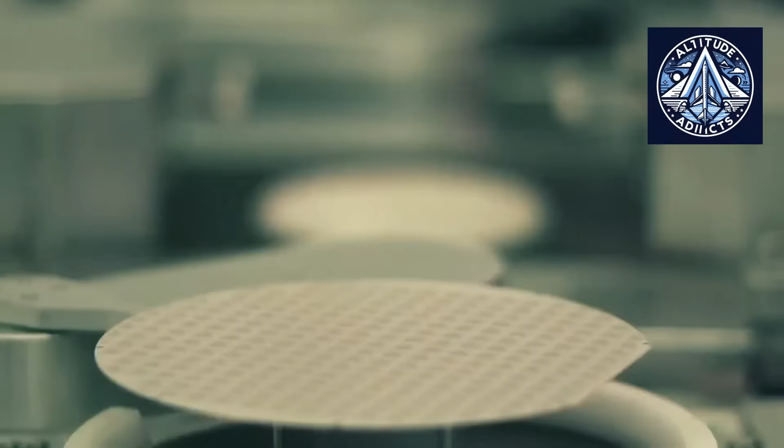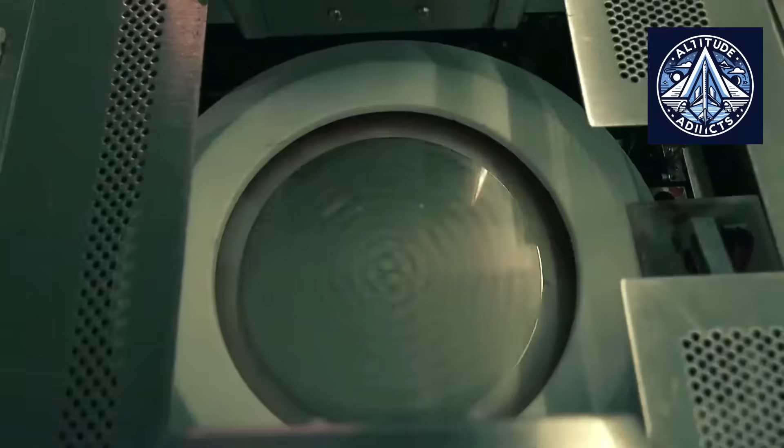The company has also pulled back the curtain on an expanded technical roadmap, revealing a higher memory version scheduled to hit the market later this summer, alongside a specialized low-power variant. Furthermore, they are planning a full structural transfer of the open-source Zephyr real-time operating system to the chip architecture before the end of the third quarter of 2026.

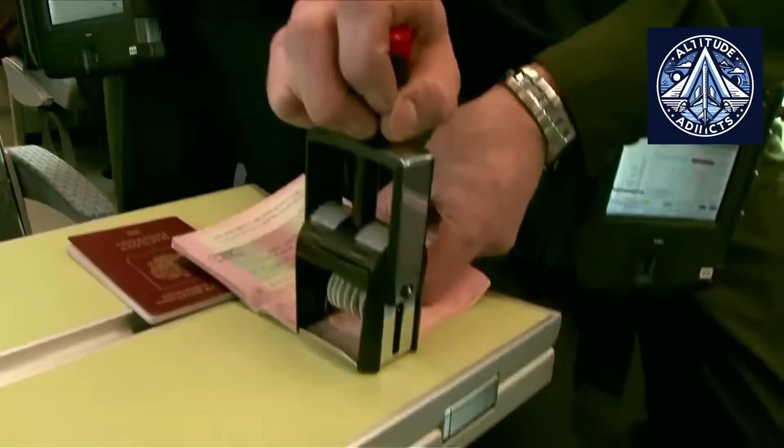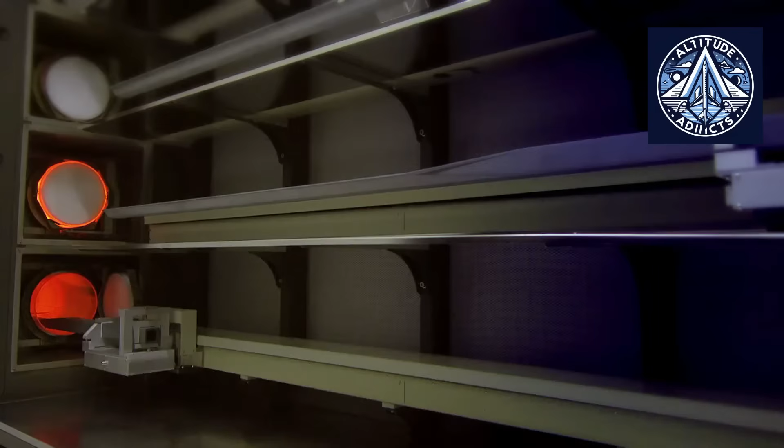To understand why this matters, you have to look at what is being replaced, because the Baikal-U is specifically built to completely substitute the STM32F4 and STM32F7 families from STMicroelectronics. Those European components are currently the most extensively used foreign industrial microcontrollers across Russian automation and embedded systems. That is why this sudden, large-scale hardware pivot is such a major industrial flashpoint.

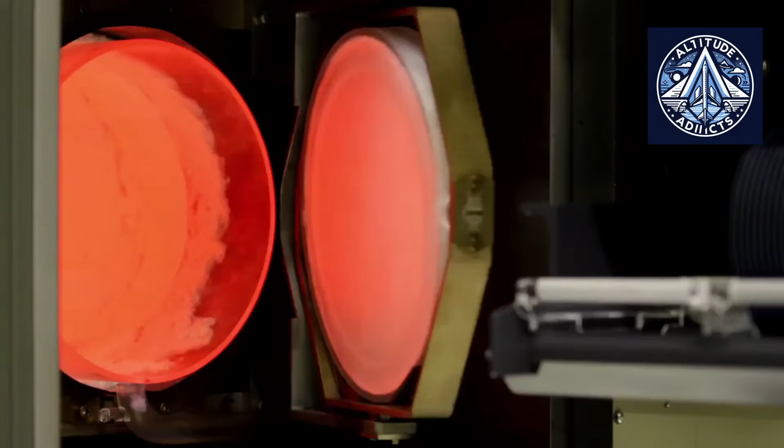Unlike previous iterations of Russian processors that relied on heavily licensed foreign CPU architectures, this entire system is constructed from the ground up on open RISC-V technology. The foundation relies on 3 distinct processor cores developed by the domestic intellectual property firm CloudBEAR.

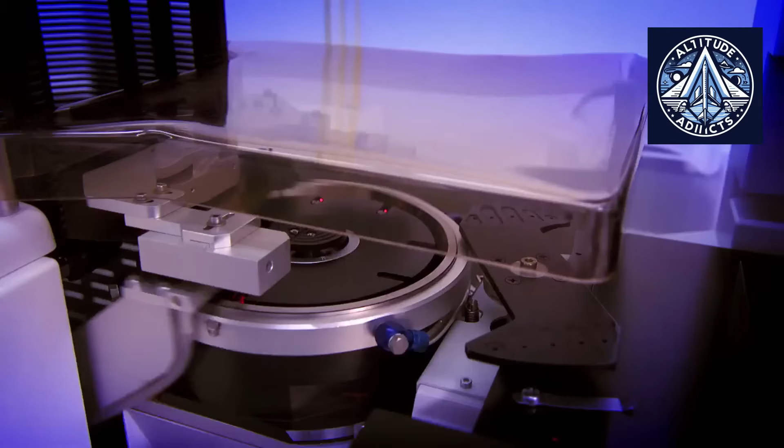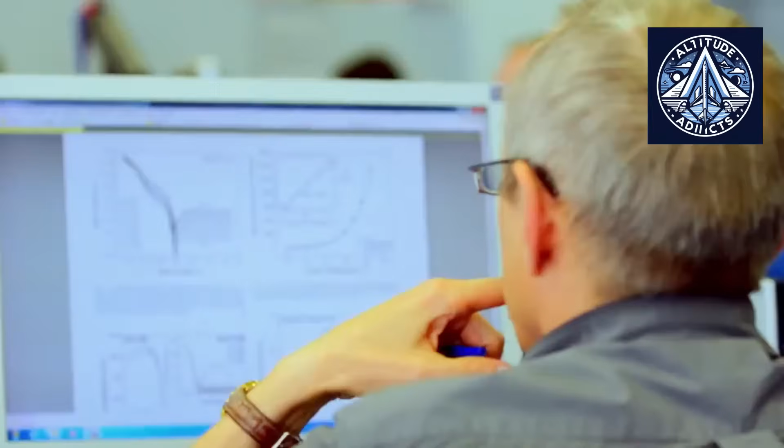Let's look closer at the silicon layout, because this microcontroller combines 2 CloudBEAR BR350 high-performance 32-bit cores running at up to 200 MHz, with a single CloudBEAR BM310 core operating at up to 100 MHz. Rather than just trying to throw raw computing capacity at a wall to see what sticks, each individual core is assigned a highly specific function inside the controller architecture.

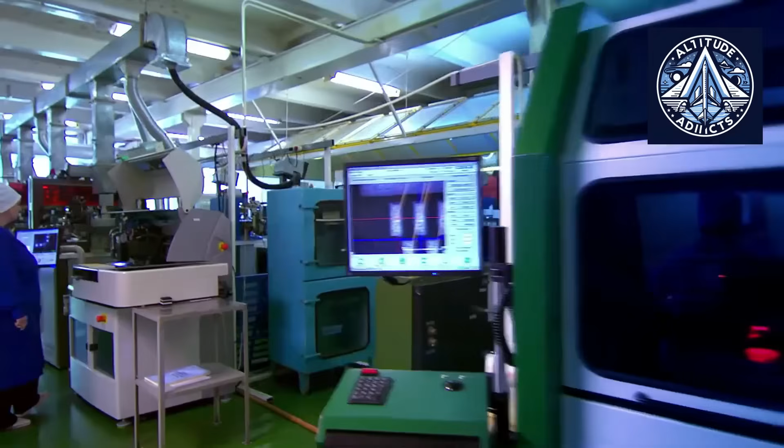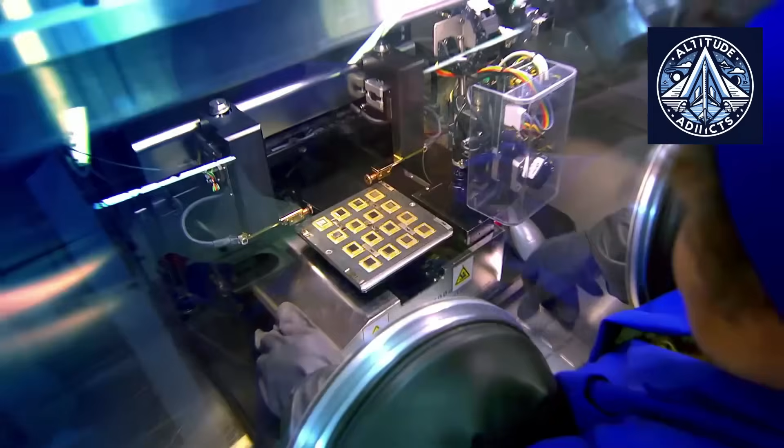For instance, a single BR350 core handles real-time control tasks that absolutely require strict deterministic timing, which makes it perfect for industrial automation and precise motor control. Meanwhile, the second BR350 core manages the background operating system services, complex communication protocols, and the primary application logic.

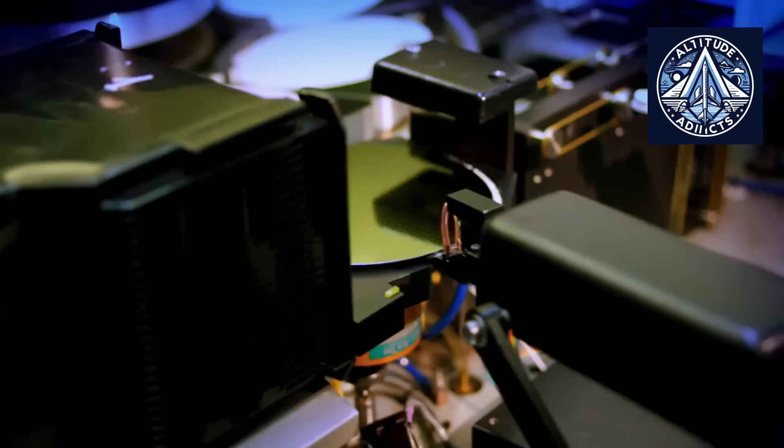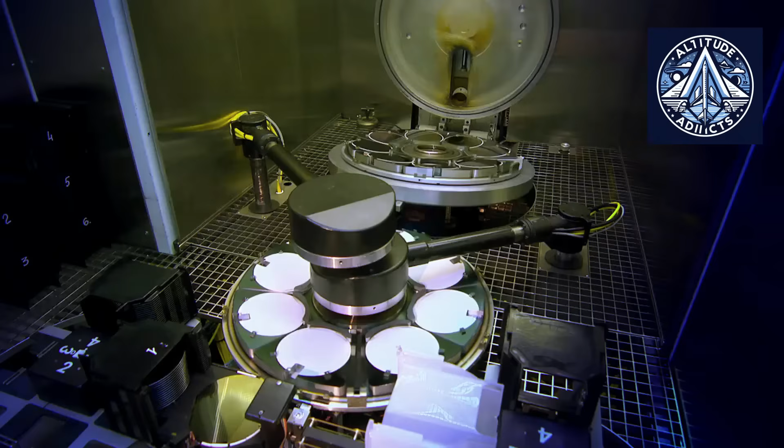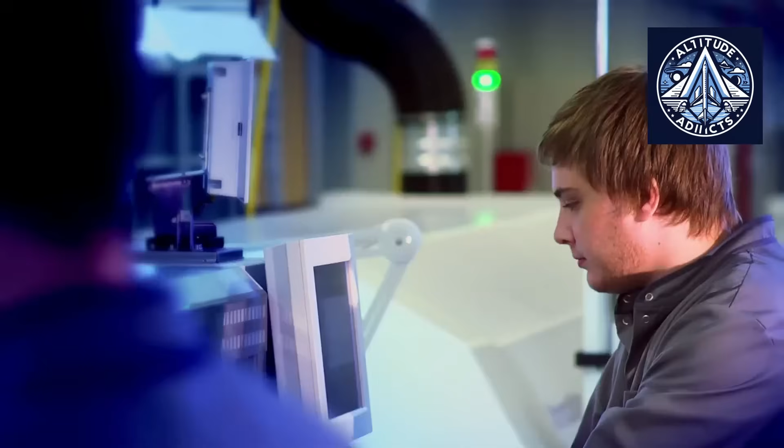The lighter BM310 core is left responsible for programmable input-output functions, allowing peripheral control interfaces to run entirely on their own without overwhelming the main processing cores. This strict division of labor is incredibly crucial in heavy industrial control systems. It allows the machine to execute multiple complex tasks simultaneously while keeping the timing perfectly predictable.

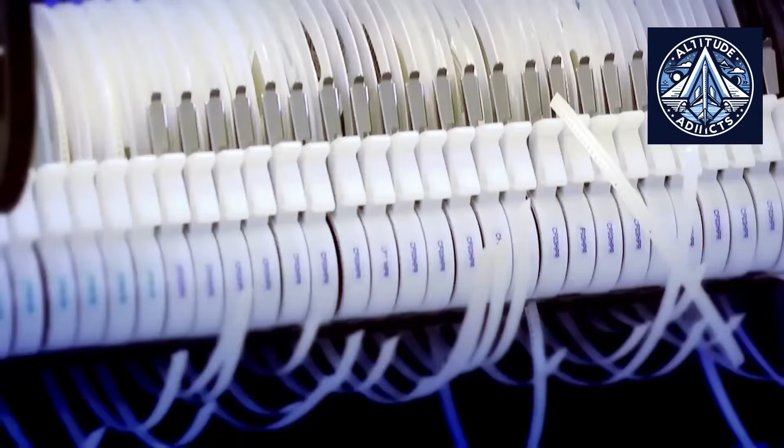Now, let's step away from the heavy specs for a second and look at the bigger picture here on Altitude Addicts. If you're tracking how modern autonomous systems and advanced manufacturing actually run, it always comes down to these tiny, unflashy chips hidden inside the metal casings.

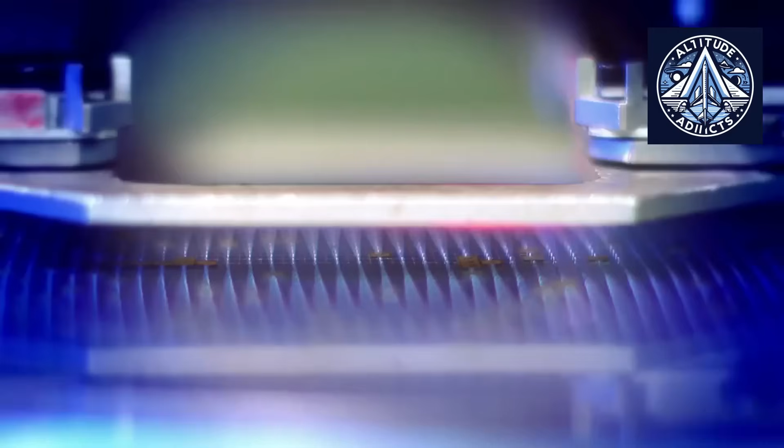From day one, the Baikal-U was engineered strictly for harsh industrial environments, not consumer gadgets or home electronics. We are talking about automated process control systems, like SCADA, and programmable logic controller environments, operator control panels, electric utility meters, and rugged industrial sensors.

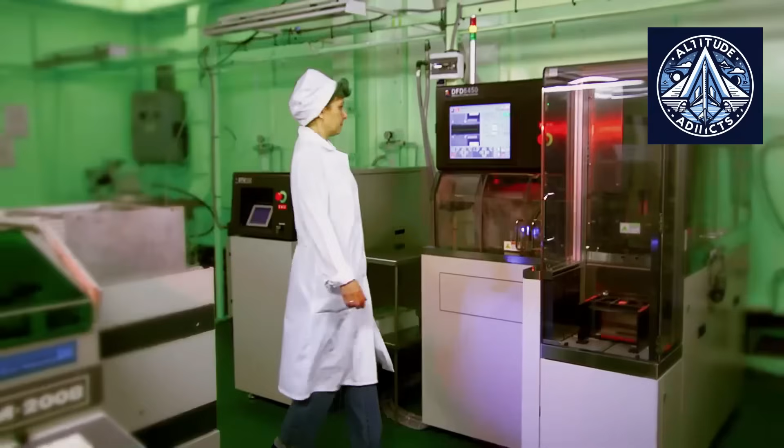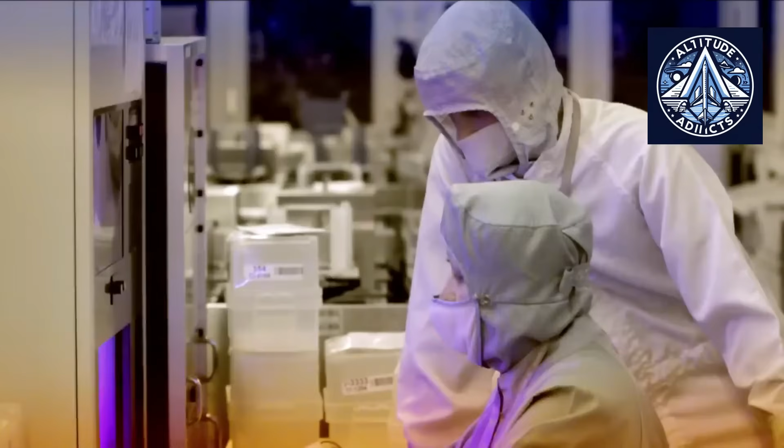It is also targeted squarely at robotic equipment, automated motor control systems, unmanned vehicles, and various industrial Internet of Things setups. Because of its deep, integrated motor control capabilities, the processor is exceptionally well suited for industrial drones and complex robotic platforms that require pinpoint real-time control of electric motors.

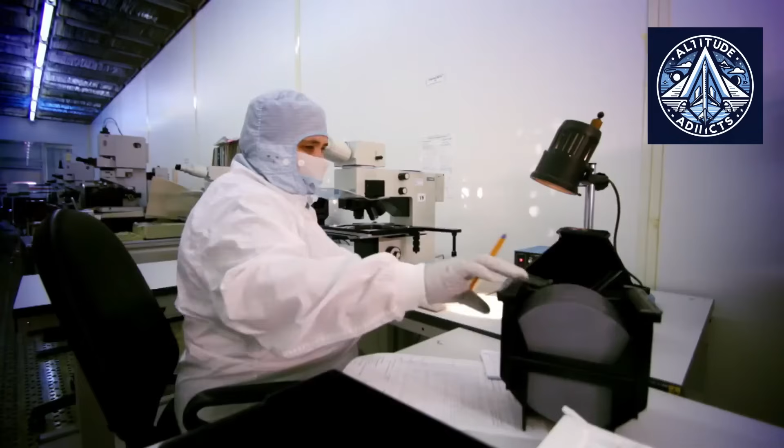The state has heavily prioritized replacing imported electronic components with domestic alternatives wherever possible, primarily because these sectors run the nation's most critical infrastructure.

Coming up next, we are going to dive straight into the brutal benchmark comparisons, showing how this new chip stacks up against the West's absolute standard, and we will reveal the exact pricing that is making this alternative incredibly cheap for manufacturers. So stay right here.

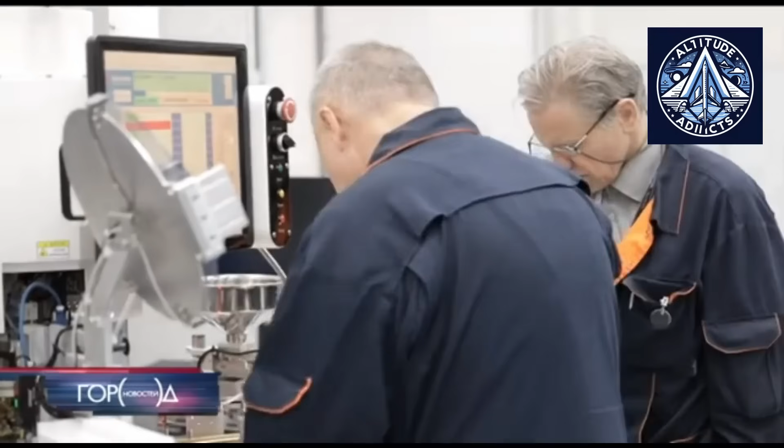One of the most fascinating claims made by Baikal Electronics is focused entirely on raw performance metrics.

The company is directly pitting their hardware against the STM32 F7 family, which is one of the most widely deployed ARM Cortex-M7 industrial microcontrollers on the planet. According to the official documentation, the Baikal-U achieves a score of 1,788 in CoreMark testing and 865 DMIPS. In stark contrast, the classic STM32 F7 device it is being compared to delivers 1,082 in CoreMark and 462 DMIPS.

Depending on the exact STM32 model you pull for a side-by-side comparison, these numbers indicate a massive performance jump of roughly 65% in CoreMark and about 87% in DMIPS. Overall, the developers state that Baikal-U offers a processing baseline that is at least 50% superior to comparable foreign controllers. Let's break down what those abstract terms like CoreMark and DMIPS actually mean for real-world machinery.

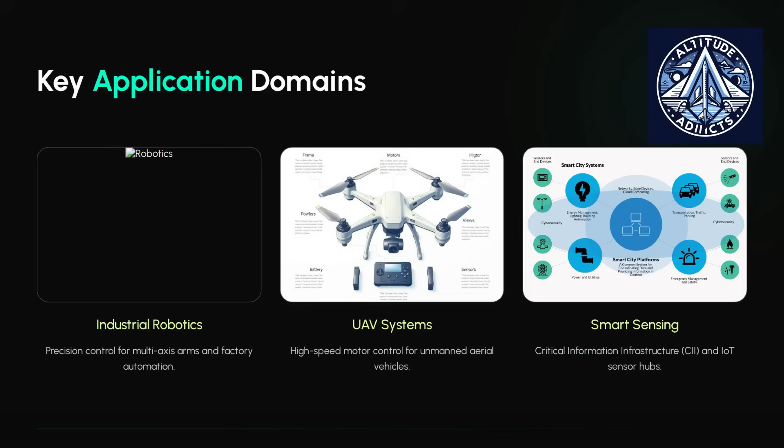CoreMark is the standard industry benchmark specifically built to test embedded processors by measuring how efficiently a chip runs day-to-day duties like data processing, state machines, linked lists, and basic math operations. A higher CoreMark score simply means the processor can tear through a much larger number of software instructions in the exact same window of time. This translates to an ability to handle far more complex control algorithms, dense sensor processing, or robotics tasks without needing to overclock the chip or run higher clock speeds.

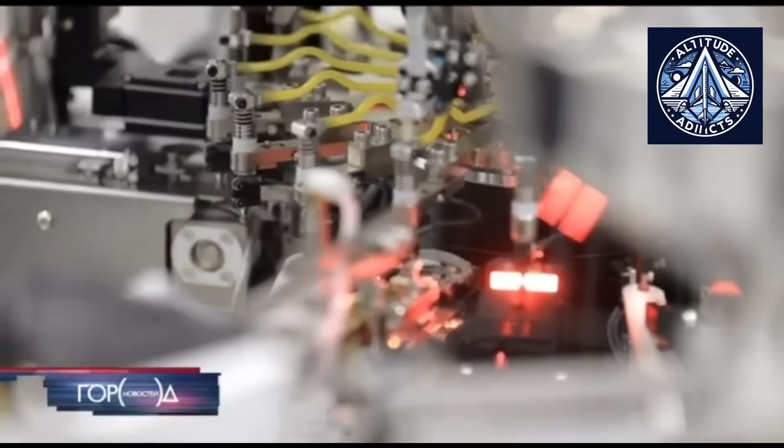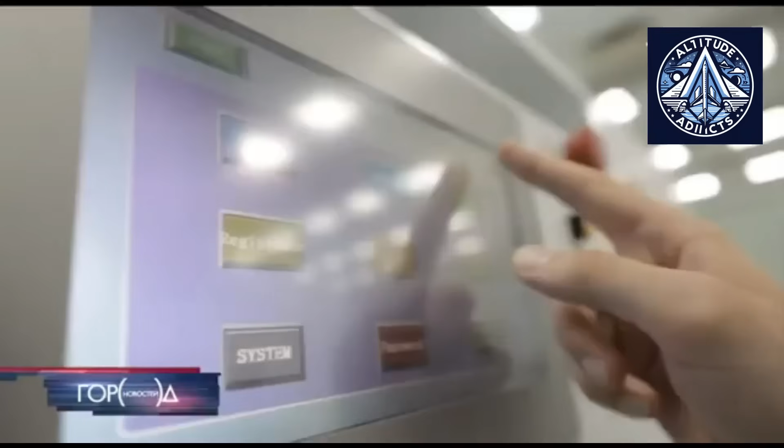On the flip side, DMIPS, which stands for Dhrystone Million Instructions per Second, gives engineers a solid estimate of the processor's general raw computing capability. Even though the Dhrystone test is older than CoreMark, the embedded CPU community still uses it heavily for fast comparisons. By pushing its DMIPS from 462 up to 865, the Baikal-U architecture can perform a significantly larger volume of general computational work every single second.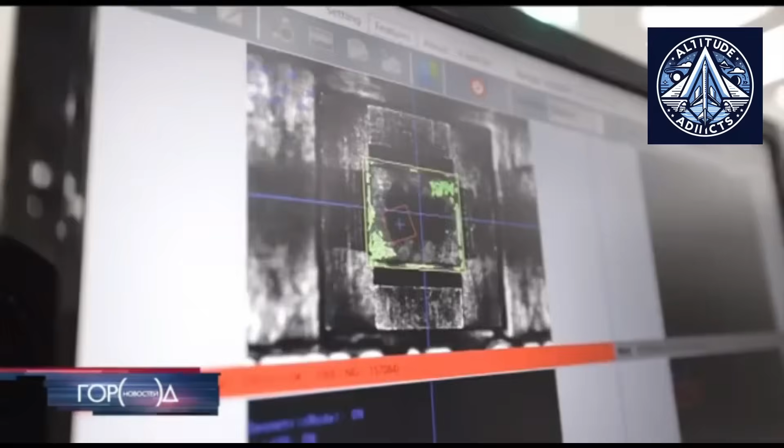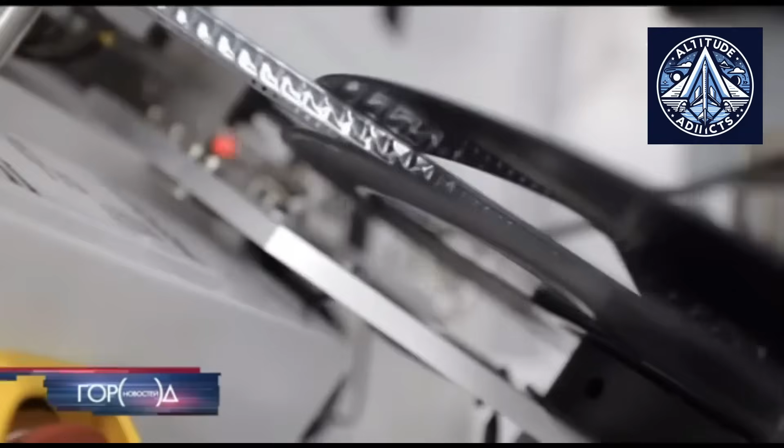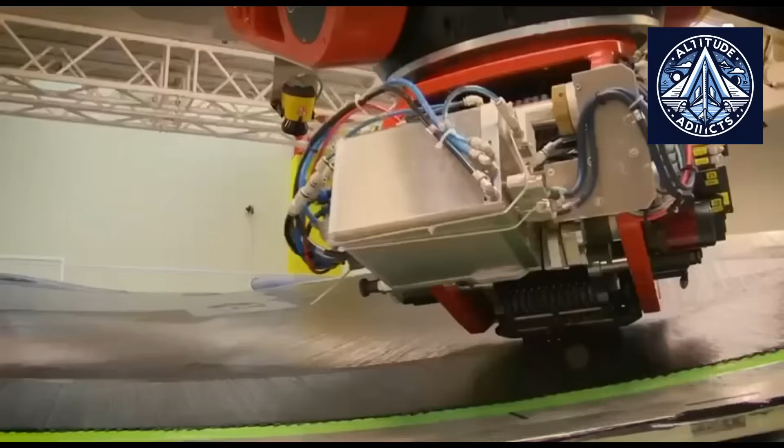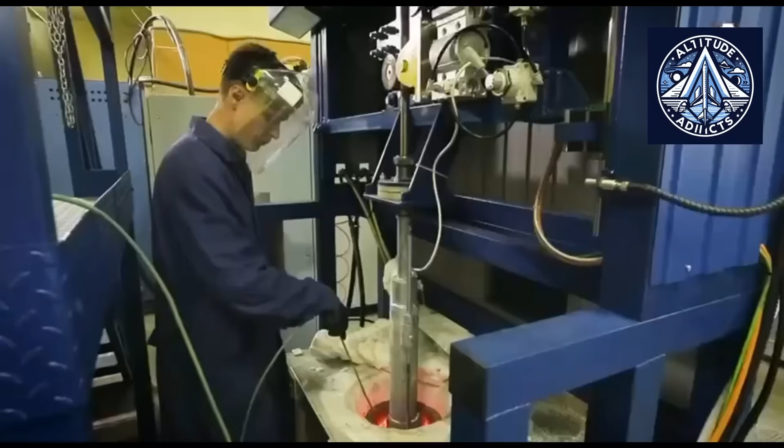All right, let's keep it real for a minute and drop the corporate marketing talk. Just because a benchmark number goes up on a graph does not mean a factory machine or an assembly robot is suddenly going to move 80% faster in real life. Instead, that extra computational headroom gives engineers a ton of very practical development benefits. A single Baikal-U chip can easily manage complex control loops while simultaneously handling external communications, background diagnostics, and critical safety monitoring. This means engineers might no longer need to buy and wire up multiple separate controllers for a single machine, because one chip finally has the computational muscle to do everything at once.

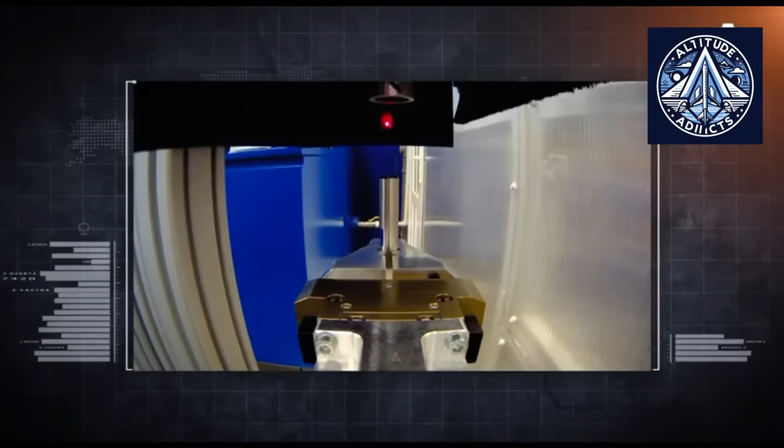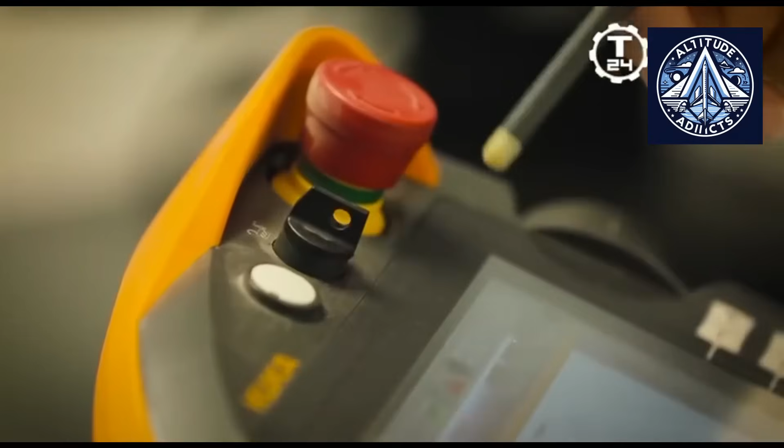When you look at advanced robotic systems, having this extra processing power makes it much easier to digest complex sensor inputs rapidly, improve real-time trajectory calculations, and deliver far tighter motion control. Industrial automation systems can also run a much higher number of communication protocols at the exact same time without losing their deterministic, real-time response windows.

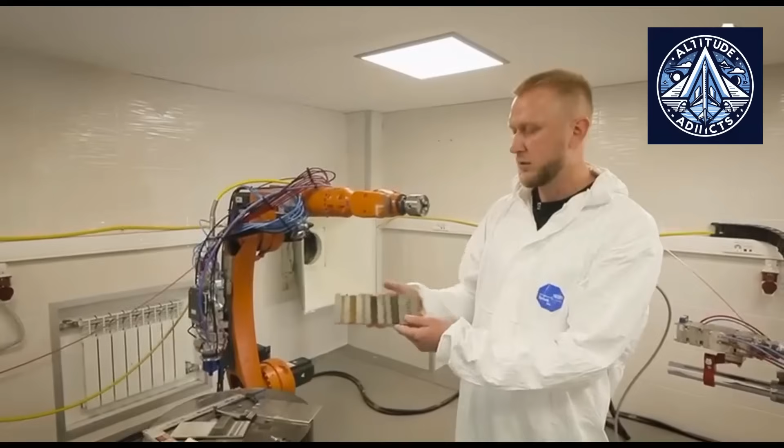For heavy motor applications, developers can now deploy advanced vector control algorithms or adaptive control techniques without completely bottoming out the processor's capability. Plus, having that extra performance baseline gives software teams plenty of flexibility to push out major firmware upgrades down the line without forcing the factory to tear out and replace the physical hardware. So, the real win here is not just bragging rights over benchmark numbers, it is the massive expansion of what an embedded system can actually do out in the field.

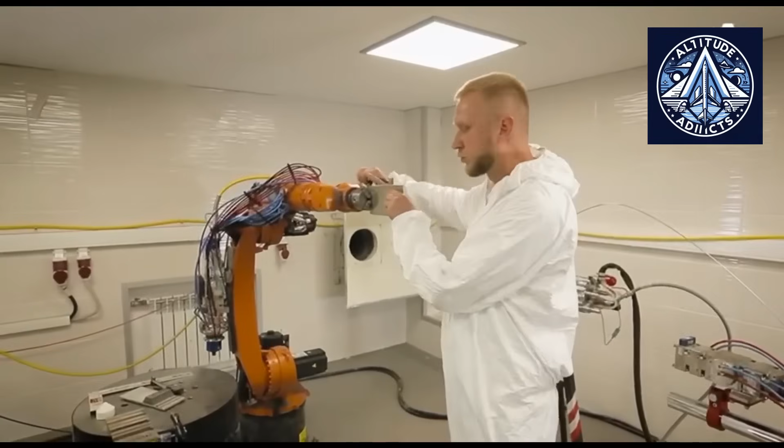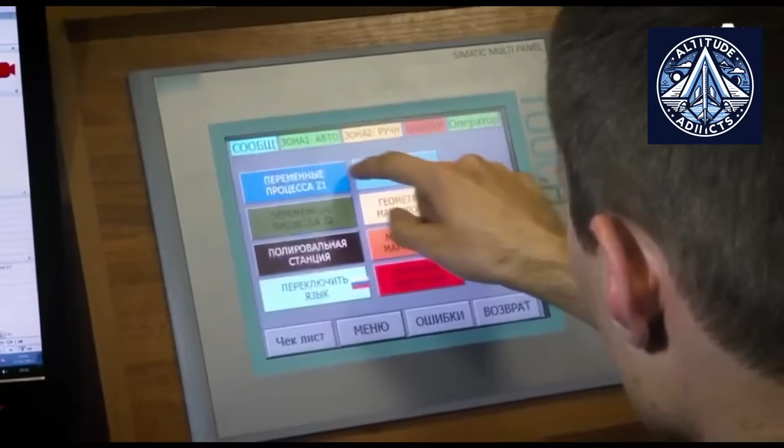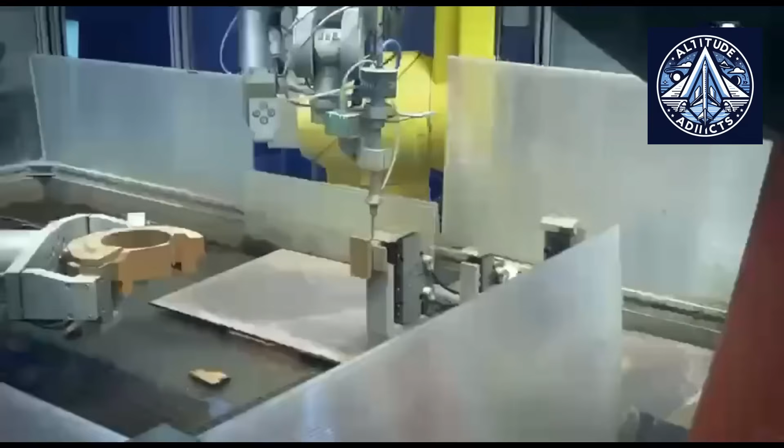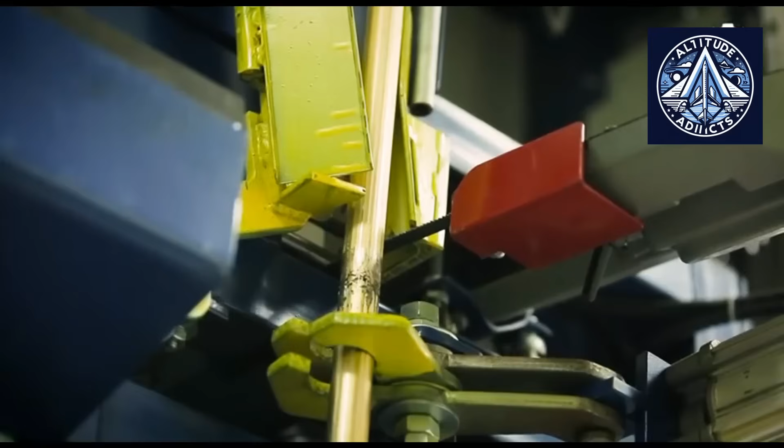Let's talk about the money side of this, because Baikal Electronics has priced this microcontroller incredibly aggressively despite their high-end performance claims. For high-volume industrial buyers, pricing starts down at approximately 550 rubles, while the standard recommended retail price sits right around 950 rubles per unit. This aggressive pricing model is explicitly designed to ensure the Baikal-U is completely cost competitive with imported STM32 class microcontrollers. It is aimed straight at industrial manufacturers who purchase tens or hundreds of thousands of controllers annually, giving them a cheap alternative while wiping out the supply uncertainties that come with relying on foreign components.

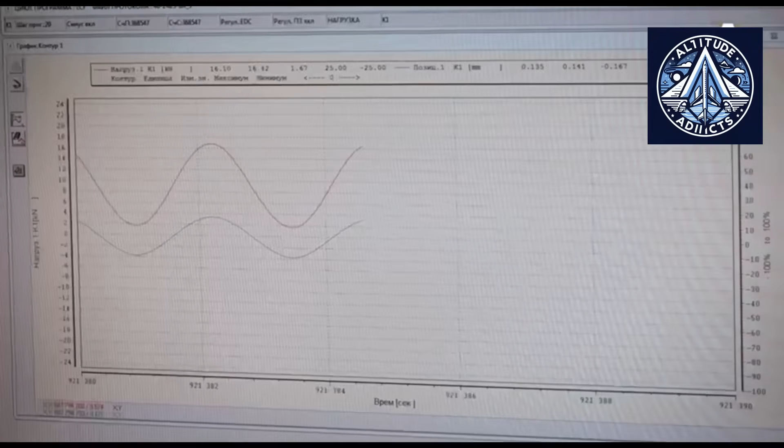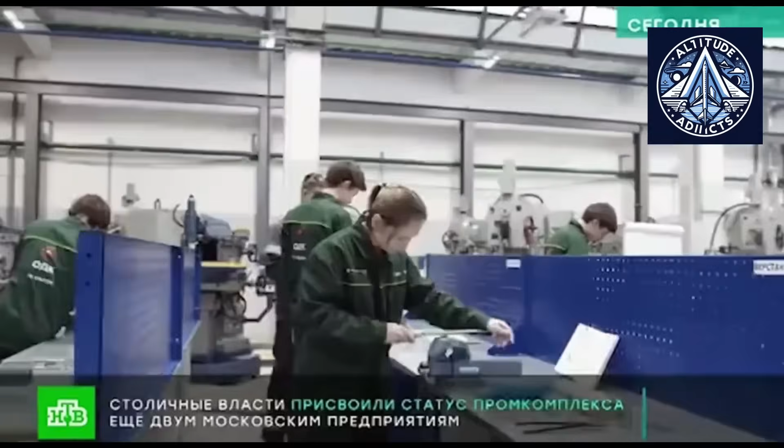Coming up in the final stretch of the video, we are going to look at the massive expansion plans, including the new low-power versions designed for long-term remote infrastructure, and how they are integrating an open-source operating system to make switching over incredibly simple for engineers. So do not go anywhere.

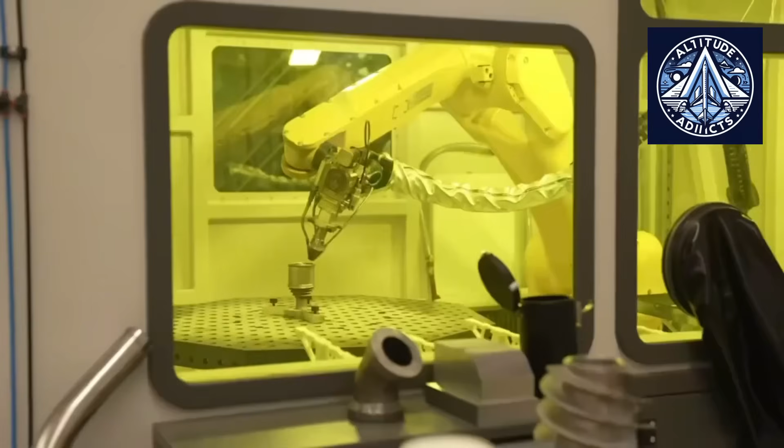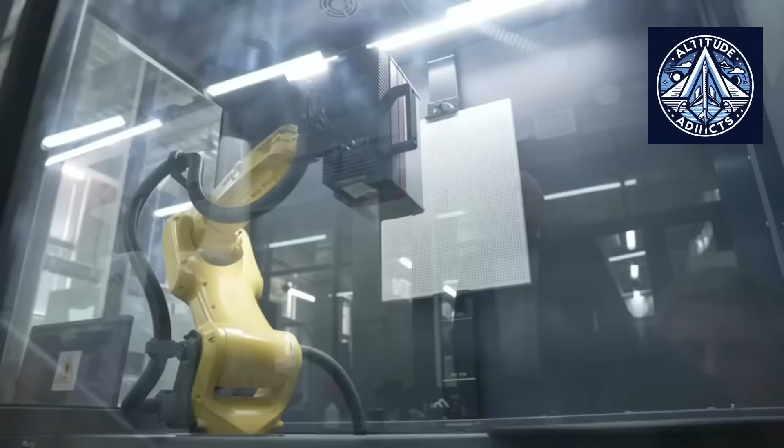Looking past the raw CPU cores, the surrounding platform carries some serious technical depth. The Baikal-U comes fully equipped with 48 general-purpose input-output lines, dual direct memory access controllers, and multiple analog peripherals, including three 12-bit analog-to-digital converters.

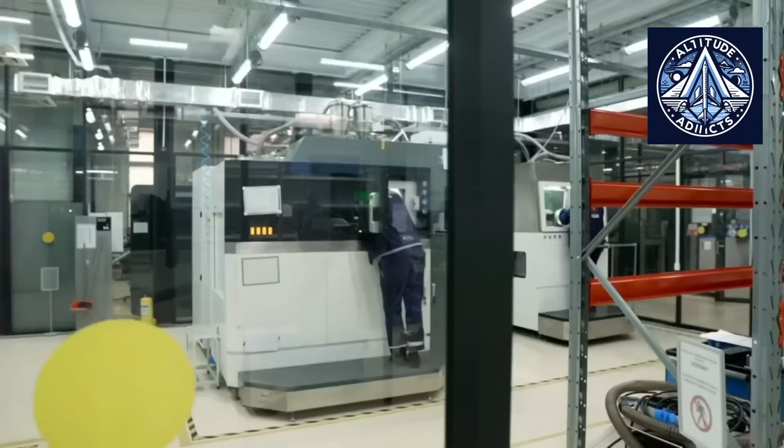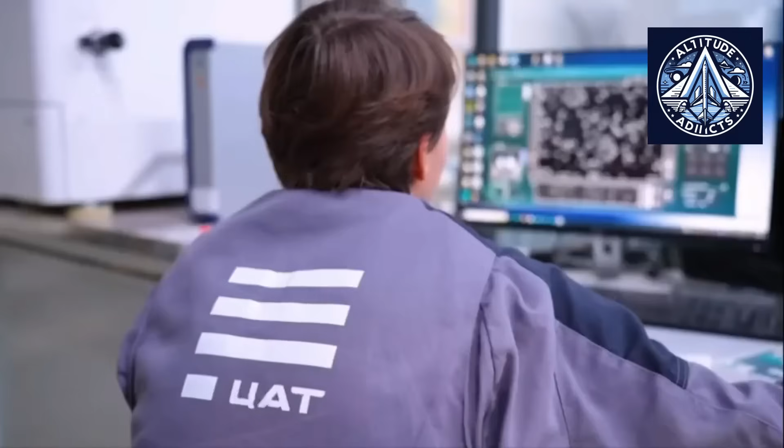It packages 192 kilobytes of static RAM, 256 kilobytes of embedded flash memory, and full support for external flash memory running in execute-in-place mode. The vast majority of complex industrial networking and communication needs are fully covered by onboard interfaces, which feature USB 2.0 OTG, CAN FD, UART, QSPI, I2C, and I2S. The platform even includes native, built-in support for MicroPython, allowing software engineers to rapidly prototype new applications before deploying them

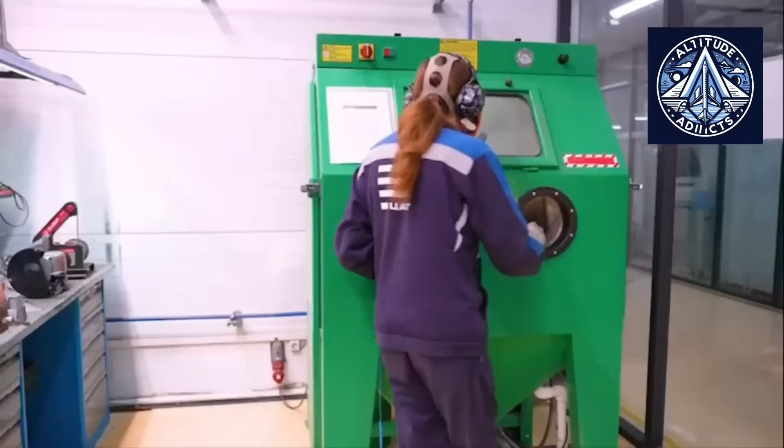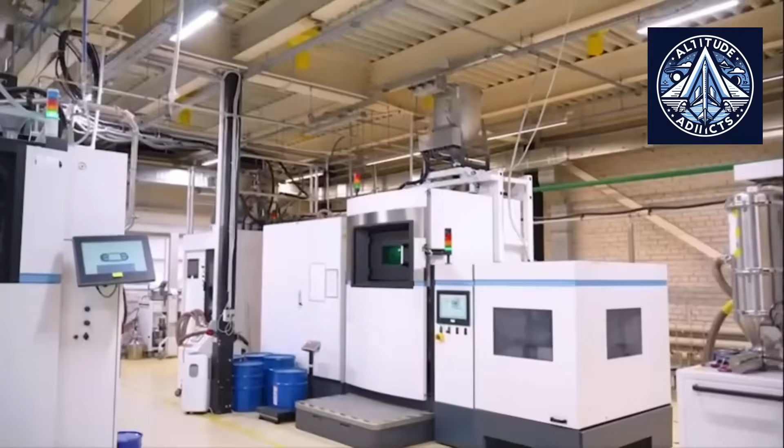into full production systems. This brings us back to a core focus here on the Altitude Addicts YouTube channel, where we closely monitor how shifting global technology landscapes impact real-world manufacturing. The looming 1 million unit production milestone proves that this is a genuine commercial adoption wave, rather than just a handful of prototypes sitting in a research lab.

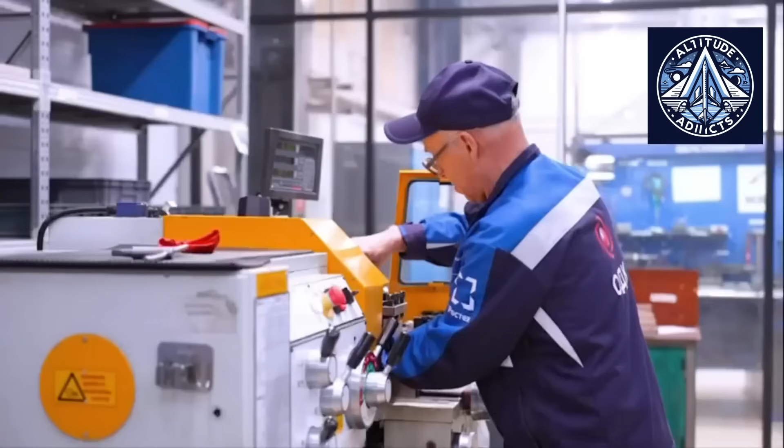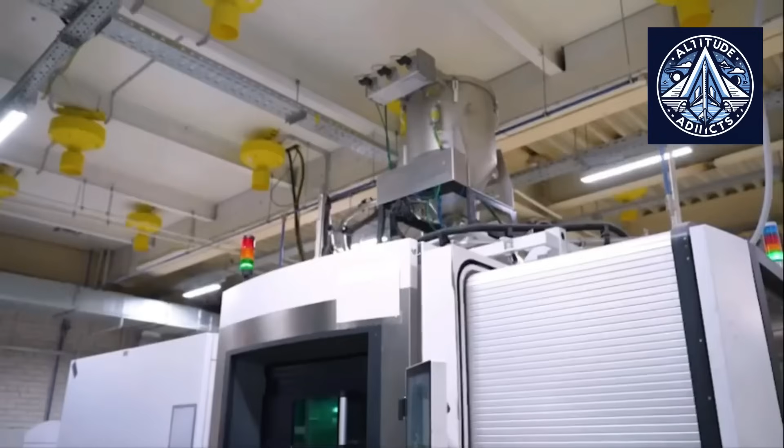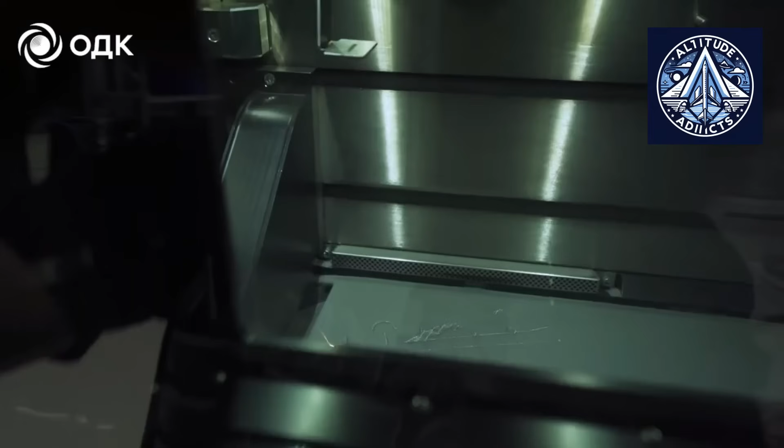In 2026, Baikal Electronics locked down one of the most substantial supply agreements for domestic microcontrollers in the country's history with the industrial automation company Reglab. The contract outlines the purchase of at least 1.5 million Baikal-U microcontrollers over a 5-year period to build them directly into new industrial automation lines and programmable logic controllers. The developers have confirmed that steady orders are pouring in from a wide variety of telecommunications and embedded equipment manufacturers.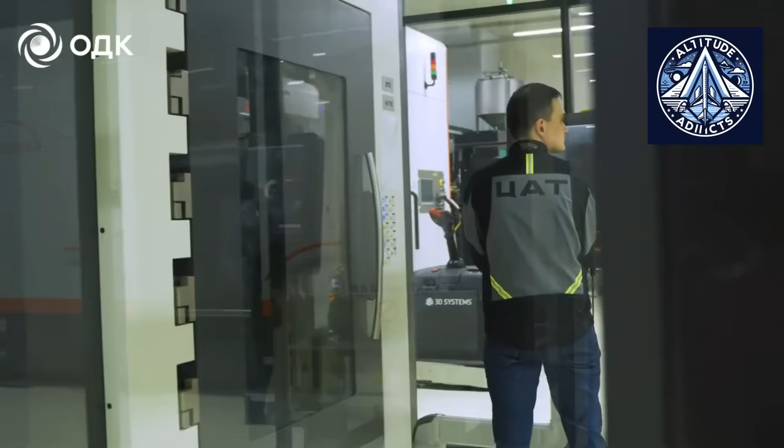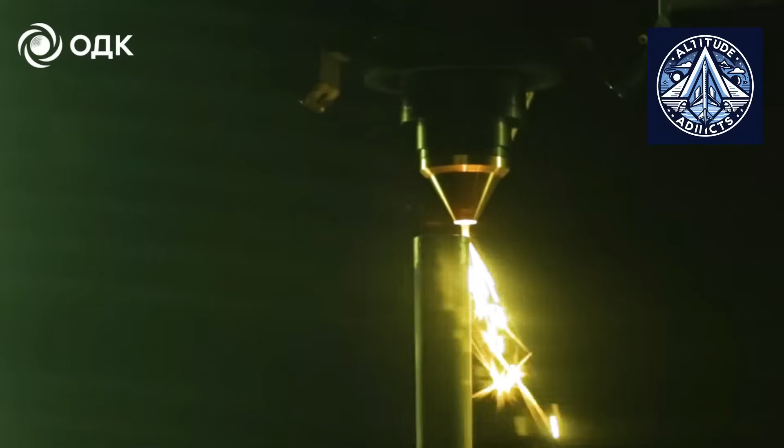The development team is already well underway, with multiple hardware upgrades scheduled for the near future. They expect to launch a specialized variant featuring significantly upgraded on-chip flash memory by the end of summer 2026. This expanded flash capacity will allow developers to write much more sophisticated firmware, implement heavy communication stacks, and run complex industrial software without needing to wire up sluggish external memory chips.

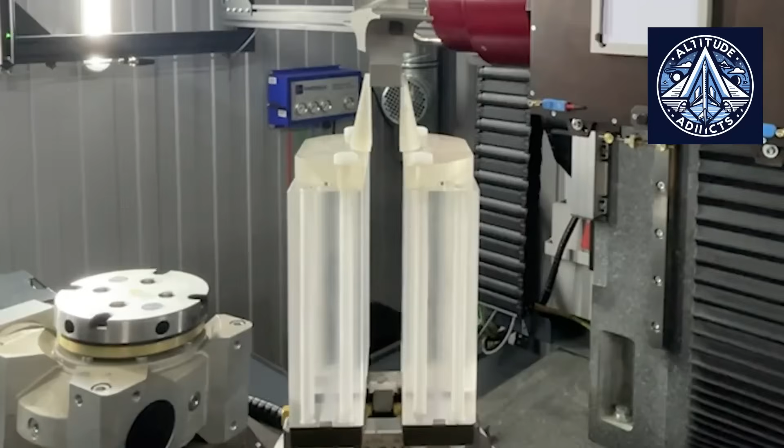At the same time, work is progressing fast on a dedicated low-power Baikal-U variant, engineered for highly energy-efficient embedded environments. Battery-powered industrial sensors, portable field instruments, and remote Internet of Things devices that need to operate for years without active maintenance are heavily dependent on this kind of ultra-low power consumption.

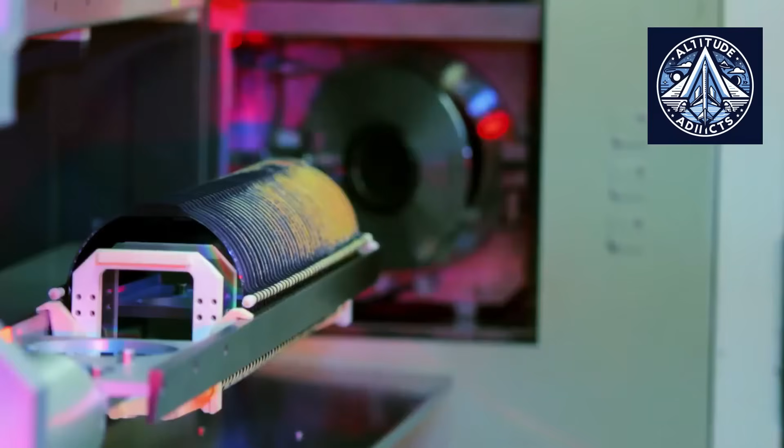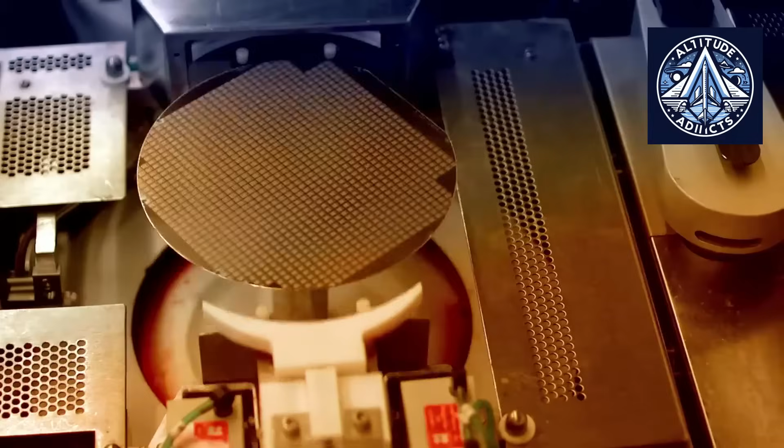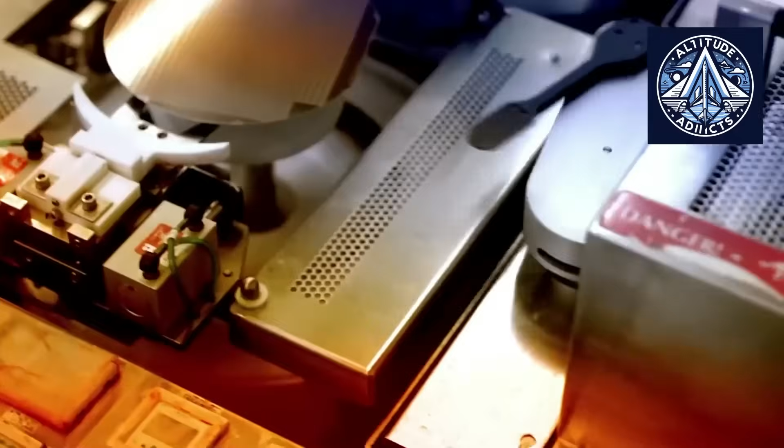On the software side, the upcoming port of the Zephyr real-time operating system by the end of the third quarter of 2026 is easily one of the most vital milestones on the calendar. Zephyr is a highly respected, open-source real-time operating system, custom-built for resource-constrained embedded devices and modern Internet of Things applications. Since its initial launch back in 2016, it has grown a massive global development community and supports hundreds of unique boards, drivers, and middleware tools.

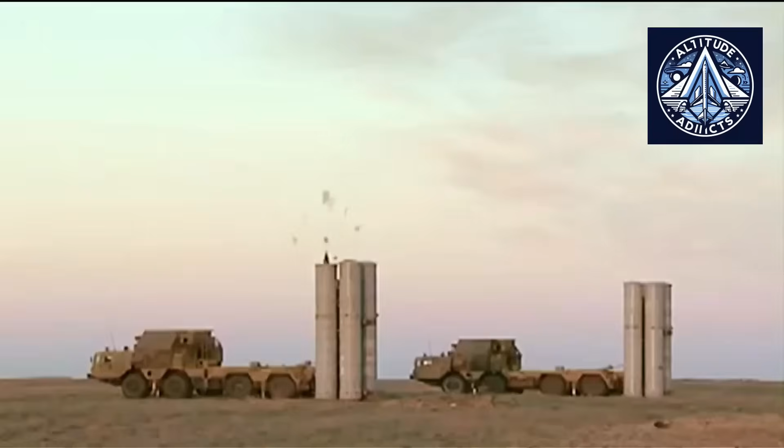By gaining full compatibility with Zephyr, the Baikal-U instantly plugs into a vast, pre-existing ecosystem of reusable software instead of forcing engineers to rely entirely on closed, proprietary development tools. Developers can immediately take advantage of highly optimized networking stacks, native Bluetooth support, robust security frameworks, file systems, and mature hardware abstraction layers that are constantly updated by the global open-source community.

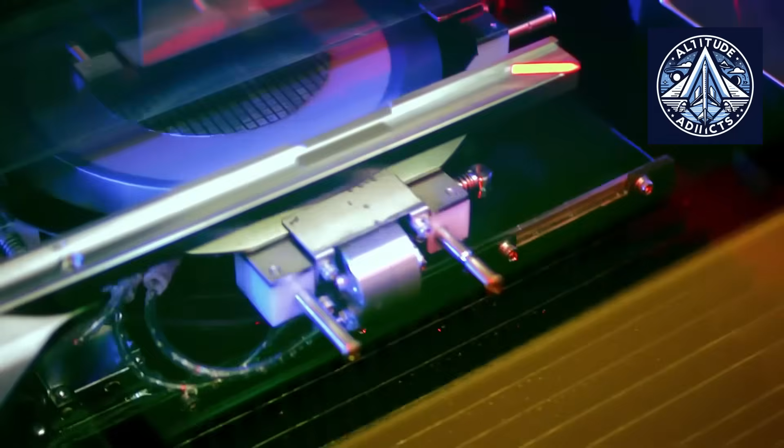This deep integration with a globally recognized real-time operating system drastically cuts down the time and effort needed to migrate old software code. It significantly shortens product development timelines for commercial enterprises looking at the Baikal-U as a direct, drop-in replacement for imported microcontrollers.

Ultimately, what we are seeing from Baikal Electronics is a strategic drive to build out a complete, self-sustaining technological ecosystem that can anchor industrial automation, robotics, motor control, and embedded computing across a massive range of domestic industries. They are pushing far past basic import substitution by pairing competitive pricing with clear benchmark advantages over classic STM32 class devices, all while pouring continuous investment into hardware and software iterations.

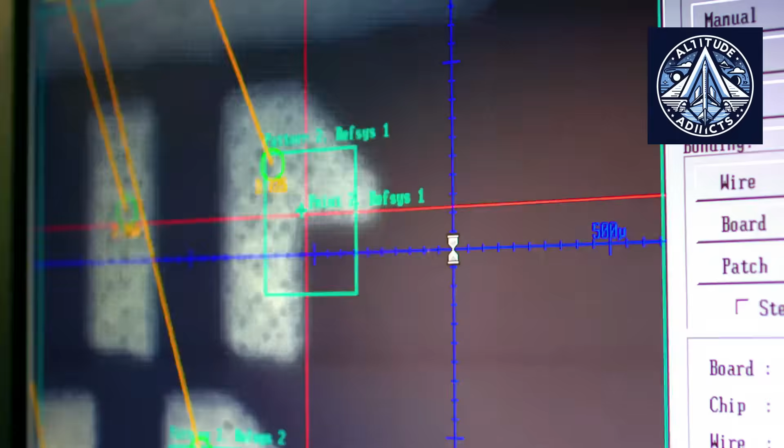As production rapidly closes in on that massive 1 million unit threshold, the ultimate objective is clear. They want to deliver a comprehensive platform combining modern architecture, high-end processing performance, and an open software environment capable of driving the next generation of intelligent control systems.